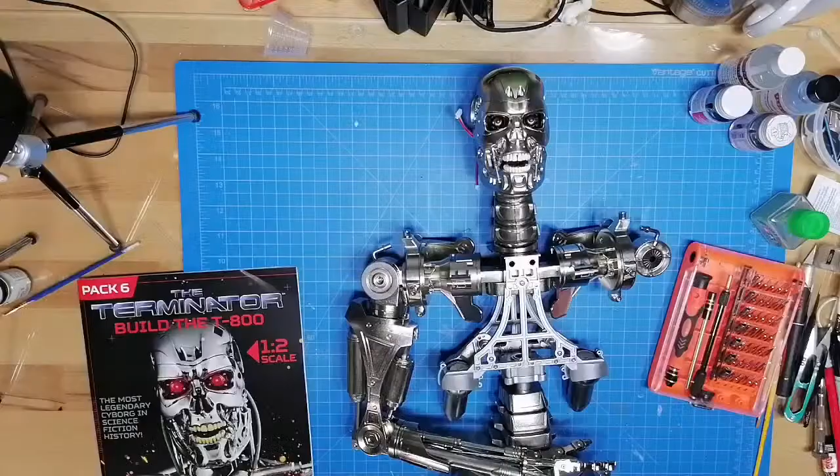Yeah, okay. I just wanted to make sure that it didn't look as bad as it did, because I use a Roku. I use a TV for my monitor where I have OBS going, and it looks terrible, but it doesn't look too bad here on the main channel, or on the main camera.

So at this point, he's up to a pelvis and one arm. Back of his skull is still off. A lot of things going on. I've got up through issue 10. I got issue 10 in this week, but Agora inadvertently left out the magazine, so I couldn't build it if I wanted to. They contacted me, and they said it's on its way. They're still really good customer service, best customer service in the business for these large part works.

So let me get him out of the way, because I'm not even sure if we're going to need him tonight. Actually, my bench is a huge mess right now. I've started shifting things off of the bench, shifting builds out of this room, so that when they're not being worked on, they're not in here. That simply gives me more room to work.

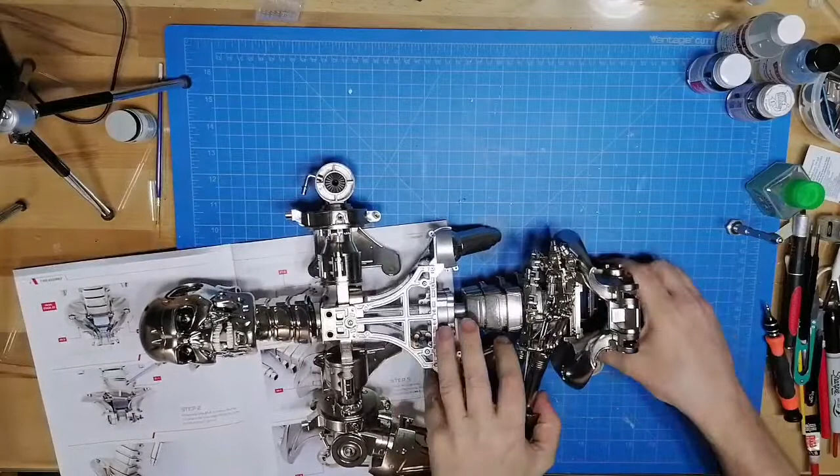Okay, so actually we do need the Terminator. Let me get the screws out of the way. Let me see what I'm going to have to do to get him in here. I'm going to have to move the magazine. Okay, take assembly from stage 50. Identify the two holes in the pelvic shield. This looks like I've got him facing the wrong way. It says to identify these two holes here, and of course it's out of screen. So there's two holes here, and I believe that's what it's talking about.

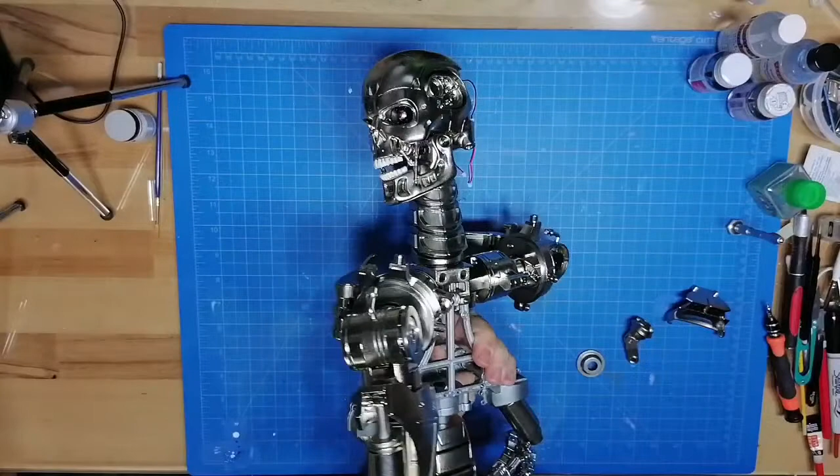So I'm looking at this, and it looks like actually this is the correct way. He should be on his back. He should actually be sitting up on something, against something.

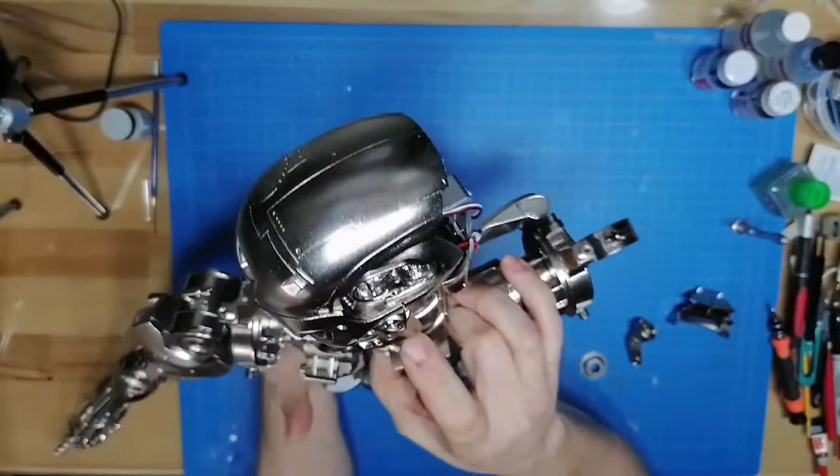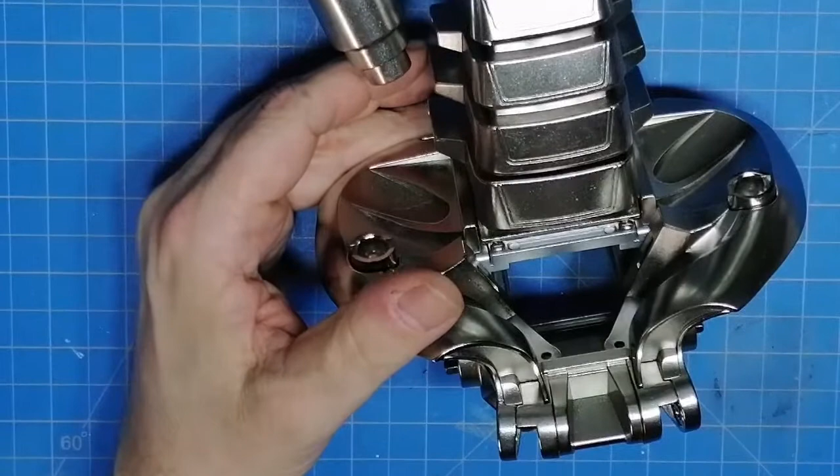So it's talking about these two holes down here. Let me see if I can get it to zoom in. That should be good. So these two holes, here and here, I believe is what it's talking about.

So this goes in here, and I'm doing this where I can't even actually see it, so let me lift him up. And he is supposed to go down. Ah, I see. So what you didn't see, what was stopping it, is right here and here is a slot for these. Oops.

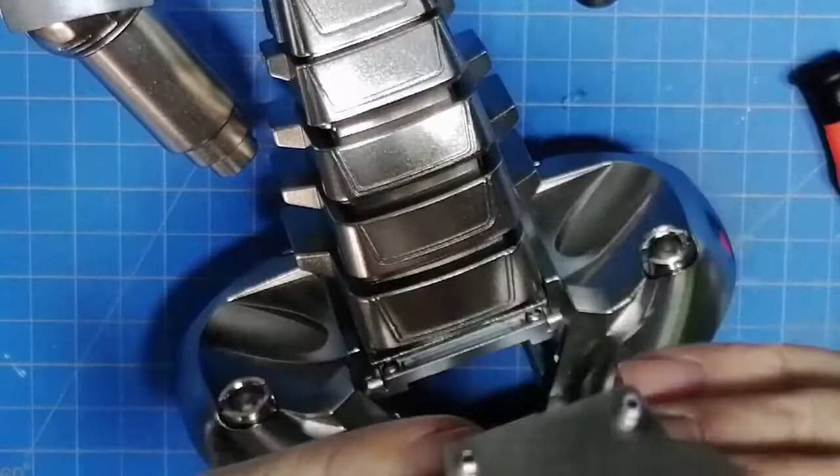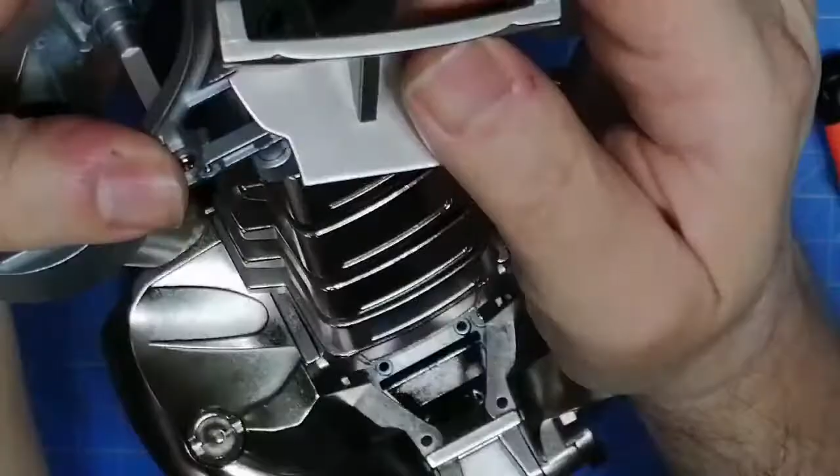You can see right there, there's a couple of, I guess you'd call them tabs, and these pins have to go down. Well, I had the pins in, and I was trying to slide it in, and it wasn't fitting, so what I have to do is do the whole thing at once. When I do that, it pushes down, and it's flush all the way around the way it's supposed to be. Not sure if you can see that.

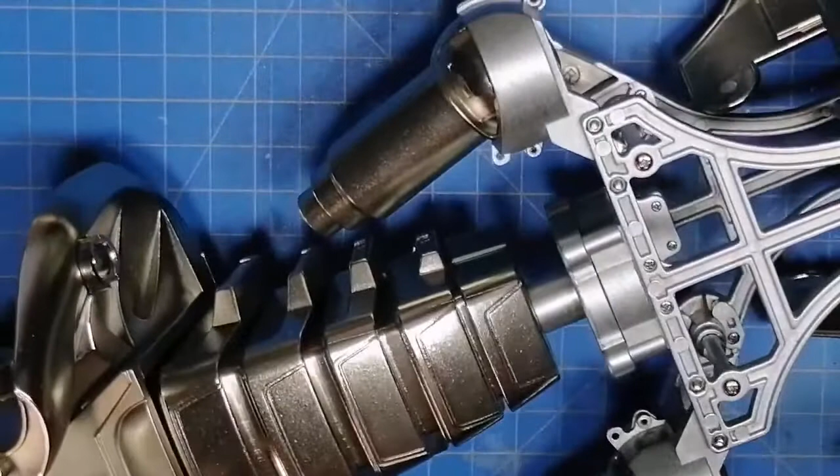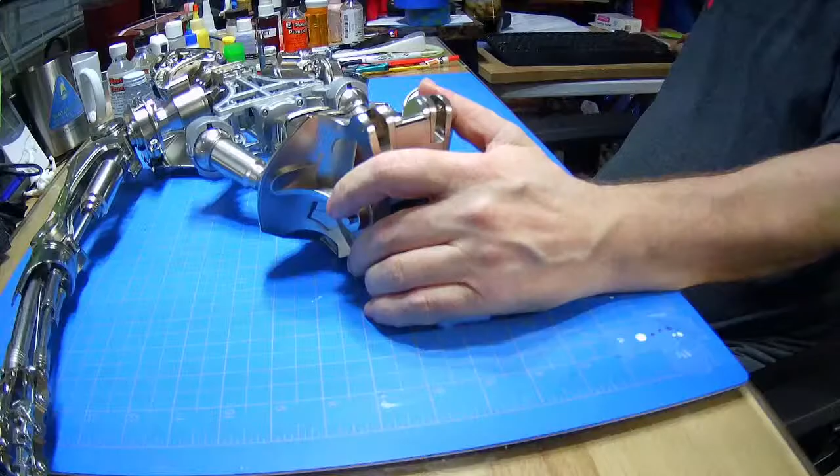Matter of fact, because we're doing it at such an odd angle, let me see. Yeah, this one's better. I can actually bring it over and point it down. And this is the part that I just put in, with the two slots up here and the pins down here. So it's supposed to fit in there. Top edge is flush with the inner edges of pelvic shields, which it is here and here.

Apply a little super glue to the recess of the hip socket. Oh wow, I didn't even catch this. On the hip joint here, it does actually pivot. So let me switch cameras again.

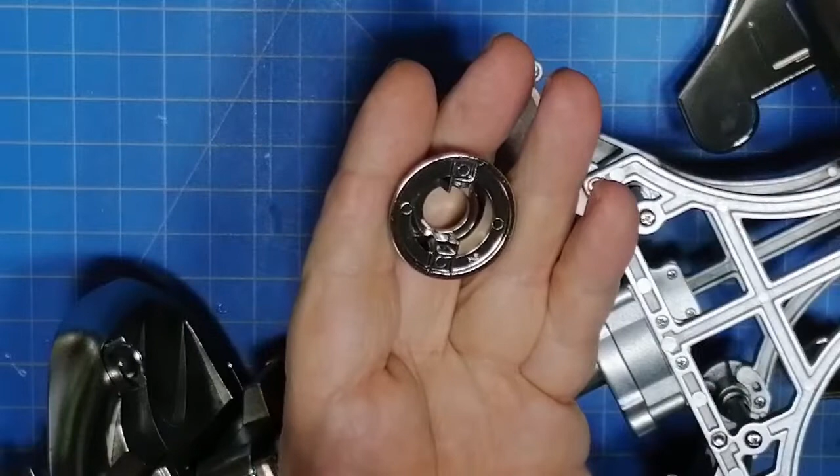Move this one back a little bit. So we've got the joint here for the hip and the hip socket here, and it says to apply a little bit of glue. I'm going to back this back out. It's always easier to hit a larger area. Okay.

And it says to apply some glue here, here, and here, and then make sure that's on the right hand side. This will be glued down on here like that, on these two pins.

So let me move my tape patch, which everybody knows I use the tape patch to put my glue on. I'm going to move it a little bit further, off camera, so that it's not in the way, because this Terminator is getting so big. Come on. I had this glue open today. Again, my cheapo stuff.

So you apply the glue in these spots. I'm going to double check and make sure. In recesses of the hip socket. I'm just making sure, and it looks like this can go either direction. Well, there's no pins or anything. So what I'm going to do is take some glue and apply a liberal amount in here. Do the same thing on the other side. Get a little bit more.

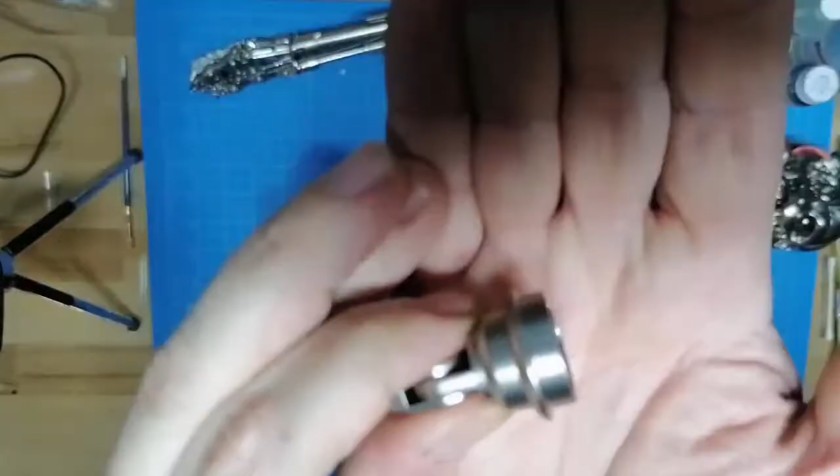And then it says to take this piece from the previous stage, and do the exact same thing, except for right around here. Oops, out of camera. Right around here, if you can see inside this flange here. So let me do the same thing here. Apply a liberal amount. Set that down while I put out more glue. And that's actually the end of that tube. That tube is out. Grab another tube.

So, other things that might be going on around here, just because my wife doesn't have a full-on space yet. She does, but she doesn't. She's got the garage where I was originally, and we're hoping to get her arthritis under control to where she can start doing her stained glass again. And if we can, rather than have her sit out in the garage in the sweltering summer or the icy cold winter, I will probably be giving up some space inside the shop here for her. I'll just take a table out, maybe a second one, and we'll work it from there. Sometimes her projects get pretty big. She needs space to put the project on and a space to use her grinder. So we'll have to see what we can do.

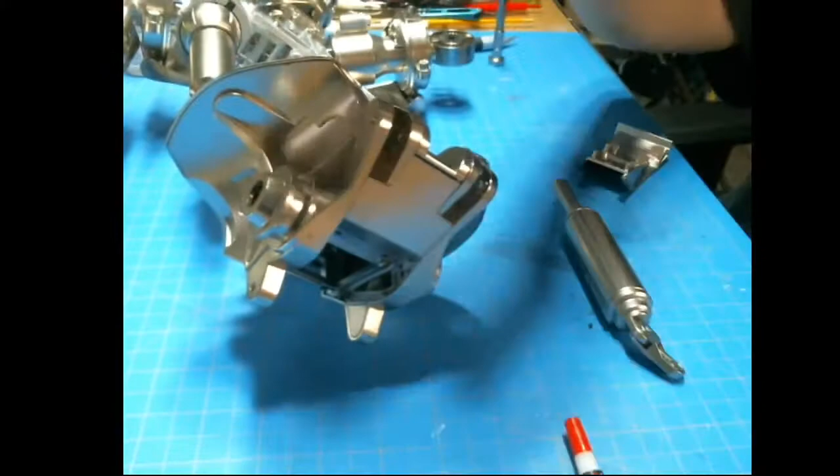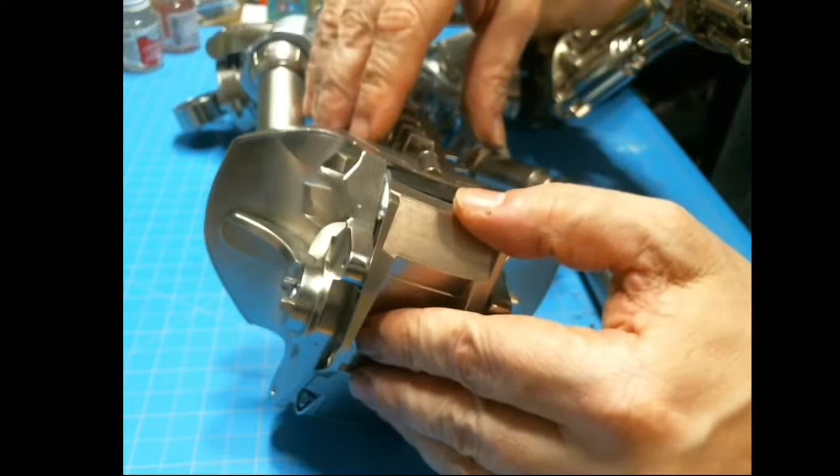So this goes here, and the 4 smaller pins go here in these 4 spots, I think, actually. Let me take a look. Okay, they've got him. Hey, look, found more glue. Okay, so they've got him face down, and this flat spot here just goes in like this. That's not going as far as they're showing it.

Ow! Be careful of sharp spots. That's because I was messing with the pins. Okay, so like I said, these 4 smaller pins will go on here, here, here, and here. Actually, it's going to be these 2, and it is just according to what it says in the instructions. Those are going to be just a push fit, not a glue fit.

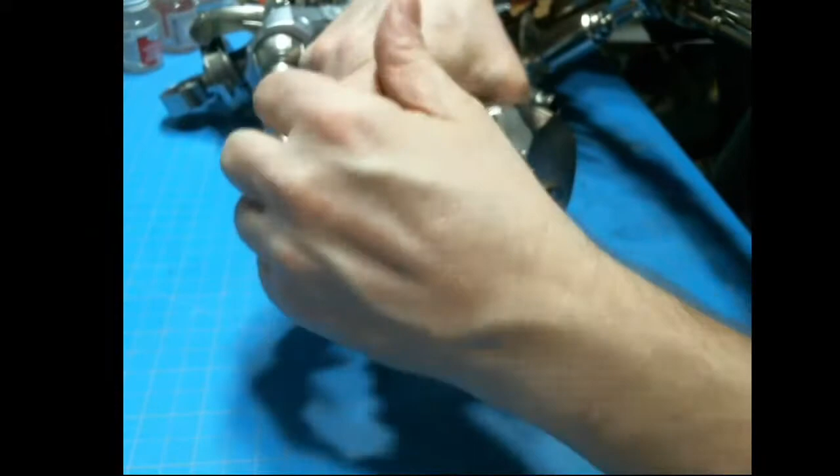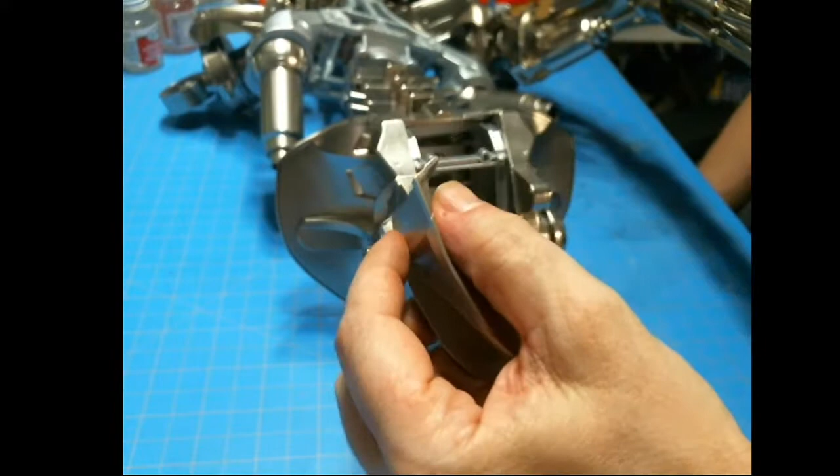Come on. Can't really tell if I'm getting the pins lined up. That looks like it's lined up, but it's just not going in. There we go. That got that, and there went that one. Hopefully you guys should have seen that because it's on camera. This one popped in, this one popped in, and it's firm in place without any glue. So we've got that, and the muscle still.

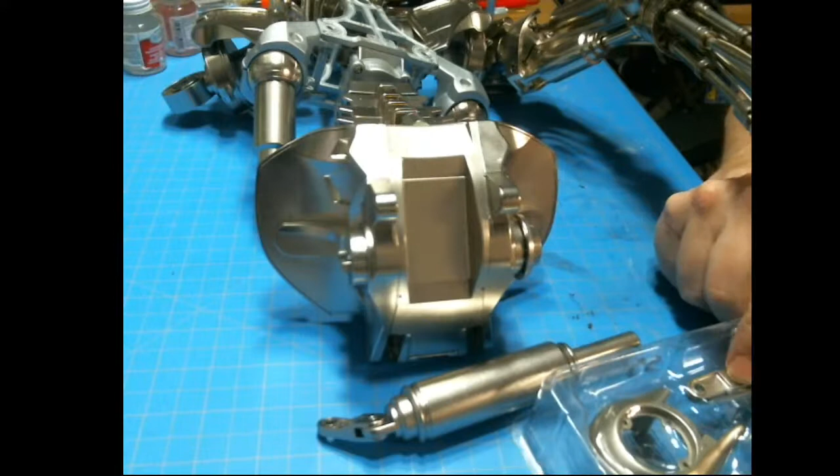So in stage 53, that's 54. Stage 53. Have a leg joint section, hip socket, muscle connect, or hip socket here, inner side muscle, and muscle connection. Okay, so this actually goes down here. It's part of the leg. It might be that by the time I'm done, the bench is not big enough tonight.

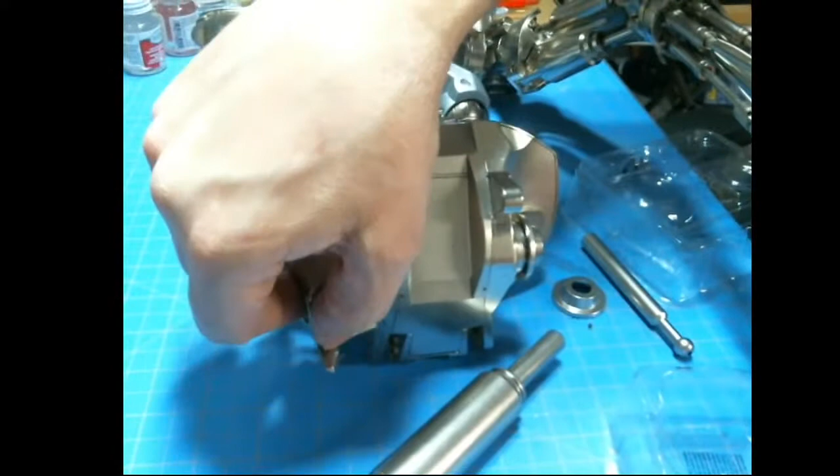Nice. The ball joint on there. So somehow I'm pretty sure this is going to go on here, or on here. Sorry, I'm on the wrong side again. Trapping part of this stuff. And need tweezers, optional, and super glue, and a cocktail stick. So they've still got, okay, they've got him back to face up.

So he's completely face up, which means switch cameras again. Hope you guys don't mind the switching of cameras all the time now, because he's so big he doesn't fit in camera. So fit the inner side muscle. This is the muscle that goes in here. I'm sure it fits down into that socket. It says push it in as far as it'll go. It's not fixed, so handle it with care.

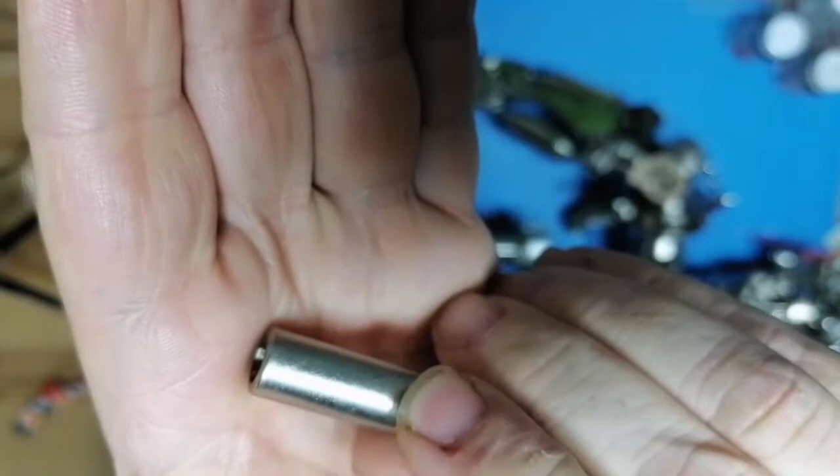So, leg joint section. Remove pieces from previous issues. Let's see, leg joint section, outer muscle, inner muscle, muscle cap, all the same things we've just seen, and the inner side muscle. So the first thing you do, just like the other one that I just saw, must have been the way the light was striking. There is a slight rub mark there. Oh, other way. Yeah, you can't really see it, but to the naked eye, there's a slight rub mark. Not going to matter that much because it's going to be inside of here.

Pop that in there. And again, glue around the top of the muscle cap where these parts that stick out are. I guess you'd call them tensioning points. Sorry, I'm off camera. Putting glue on. And incidentally, haven't said it tonight, so far all the pieces I've been working with tonight are plastic. So that slides down in here, like that. Pushed it down, leaving the inner muscle still in there, but trapping that piece.

And of course, do the same thing to the other end as earlier. Oops, not on the inside. Damn it, I did get glue in there. Get that glue out because I would hate to have something grab that's not supposed to.

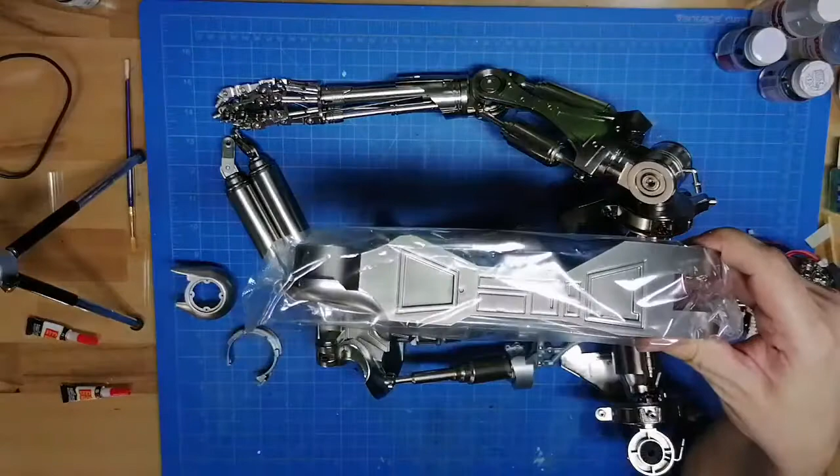And for stage 55, it's fitting the right joint mechanism to the right thigh. This, instead of being in a plastic bag, was in a box. And I can see inside there are some nuts. Okay, so it's got 5 nuts, no screws, surprisingly. I can see why, because they're going to tell me to. It says also needed is the leg joint from stages 53 and 54.

In other words, these, and super glue and a cocktail stick, which tells me these nuts here are just going to be glued somewhere on this leg piece, probably right here. Sorry, I'm off camera again. They'll be glued right here. So first thing it says to take these 2 parts here. So it takes these 2 parts right here. This one's face up, as is this one.

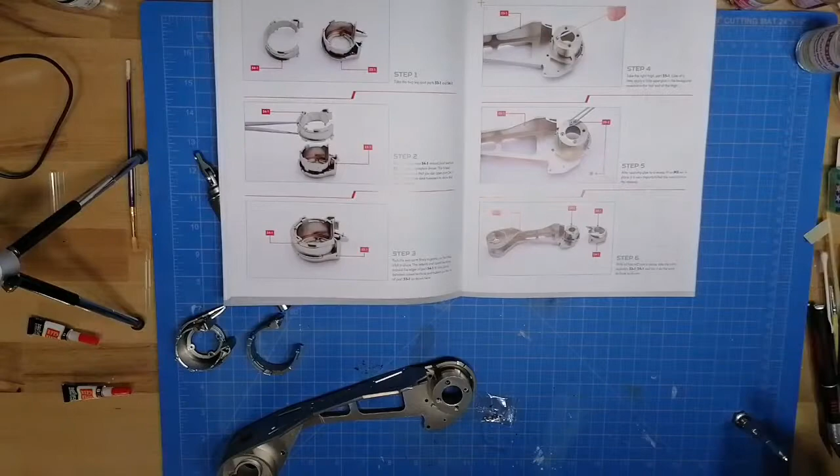Matter of fact, let me make myself a little bit of room to work. Put the book up there. Let's see. So let me get this out of the way. Put these over here. So you can see it here. It's got that part up, that part there. This larger piece is up here on the top, and it slides down in here.

I'm looking, okay, so there's a couple of pins on here. You can barely see it there. There's a matching socket in here and here. So it goes around like this. They show it with tweezers here for clarity, but I had to spread it apart a little bit to fit the pins down in. And these indents fit around the rim, so it is just a pop in place part.

Then you take the right thigh, and like I said, right here they're saying glue these nuts down, it's because you don't have the screws, I'm sure. So we glue the nuts down in place so that they don't get lost.

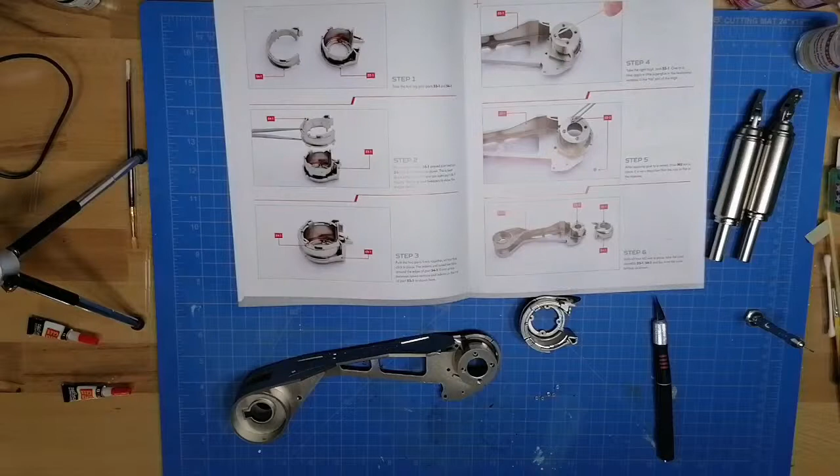Yeah, I agree with you there, Kenny, but it does happen in the summer. Wait, there went my G rating.

Damn it. So I'm going to just put a little bit of glue around the outside, trying not to get it into the hole. And instead of grabbing it with the tweezers, I put the tweezers through it so you can see that it's holding it that way. Come on. I think. Not quite. Come on, get in there. I think I'm gluing myself good. That one just is not cooperating.

Yeah, that one is in there, but it's not in there well. So let me try a different tack. Take that one out. See if I can get that out.

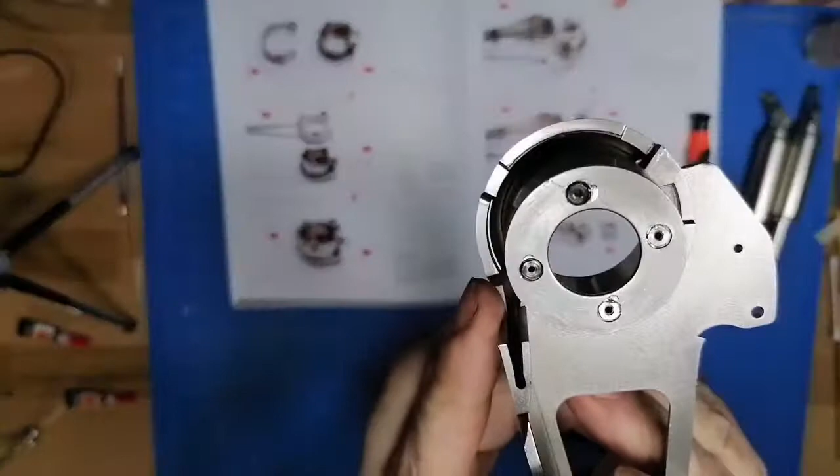So, like I said I was going to do, I just put a drop of glue on this right around each one of the nuts. Interesting. This camera does not like silver.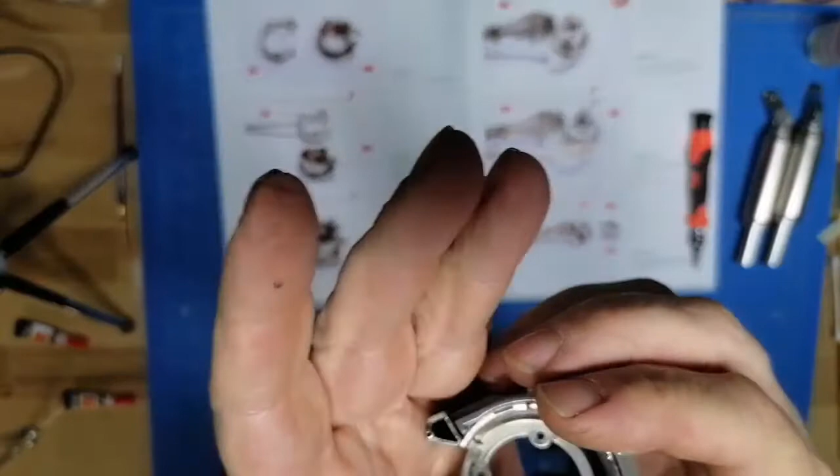So now it says take this part here. Oh, now see this. There's multiple pins here. A pin here, a pin here. Hang on. All right. So there's a pin here. Come on. There's a pin here, there's a pin here, and one down here. And those pins have got to line up with holes in the main piece.

And I just realized, guys, the reason that I keep missing, I'm used to the camera being about 6 inches further this way, but it was casting a shadow, so I had to move it. So this thing just slides down on here like that. Now it shouldn't stick onto the glue, but you can see how it should have held those nuts captive.

Where did I put the screw box? I know the screw box is here. Hate it when I do that. Oh, I hid it in plain sight. It was right underneath the orange screwdriver box. Nice.

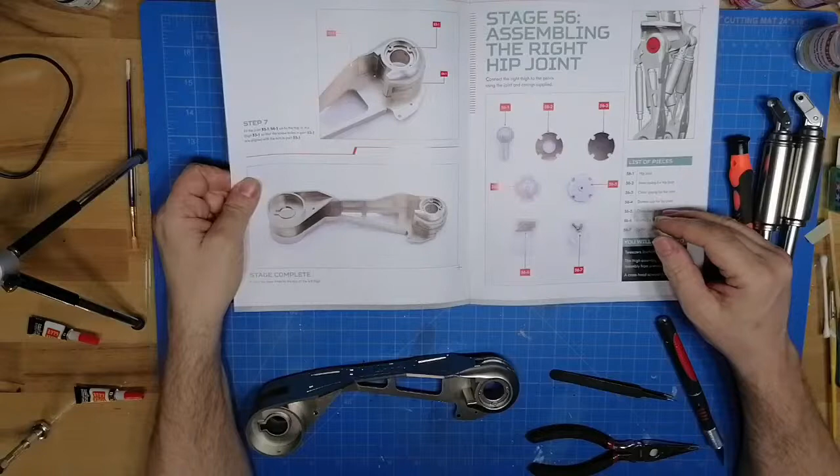So let me throw this spare nut in here. So once that's on there, yeah, so it says lay it on the tabletop so everything's lined up. And that's where I was originally going to stop, but we've been going for 55 minutes, so I'm going to go ahead and press on with stage 56 through 60.

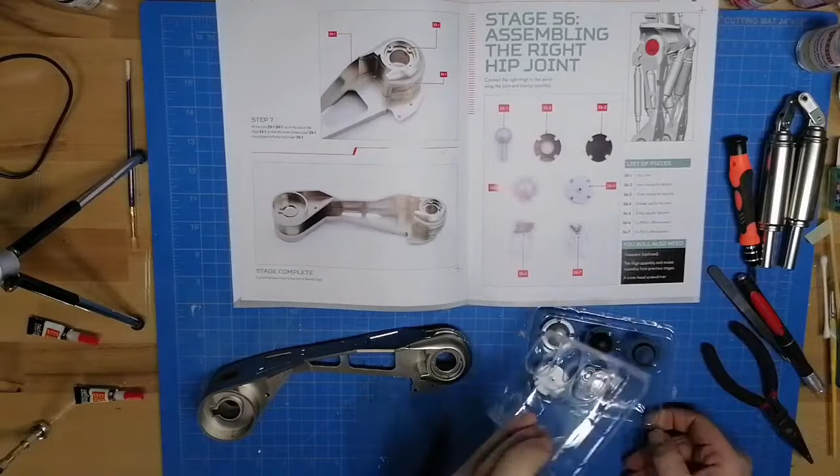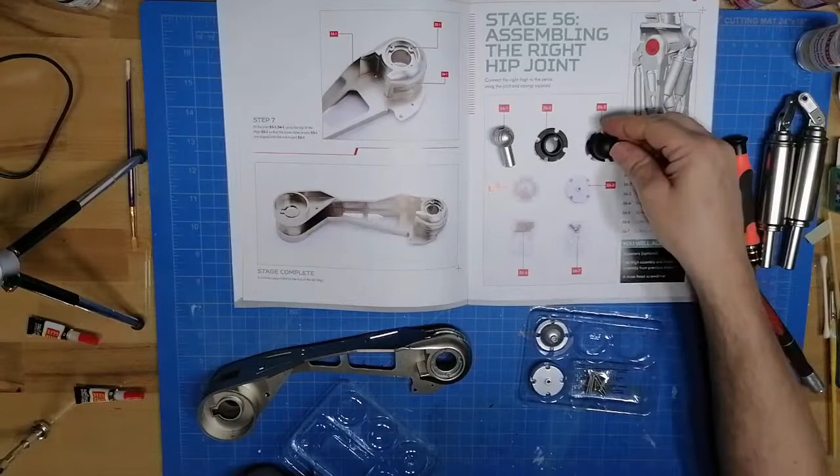Stage 56, and there is a lot going on in this stage. We've got the hip joint, and you can actually see them. I'll set them on top of the graphic for them. We've got the hip joint here. We've got the inner casing, the outer casing for the hip joint, domed cap. Let me see. Feels like, yeah, hip joint and the domed cap are metal, as is the outer domed cap here.

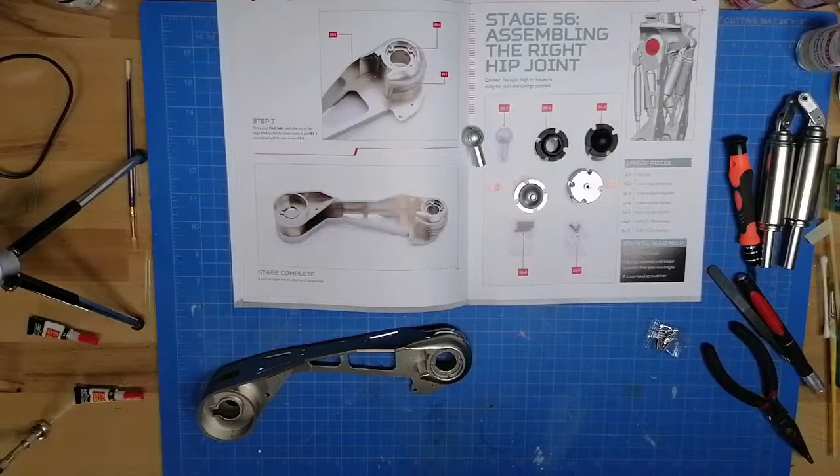And then we have 5 18mm screws and 2 8mm screws, 1 spare of each, as always. This might have been worth waiting for.

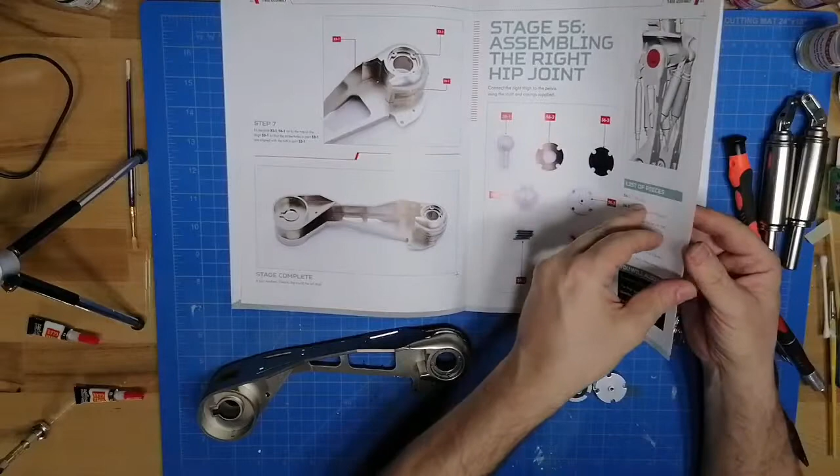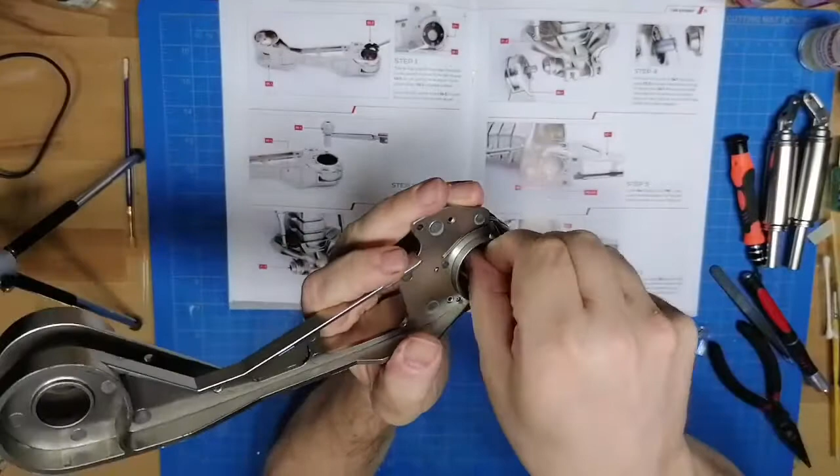So this gets flipped over. You set the inner hip casing in here, and there are some lugs in here for screws. You can see the 4 of them right there. This has to slip down over them. Let's see if I can do it while it's up there. Maybe. So that slips down over them like that.

Wow. You should be really good at cars then. I don't think I'm horrible at them, but I need some work.

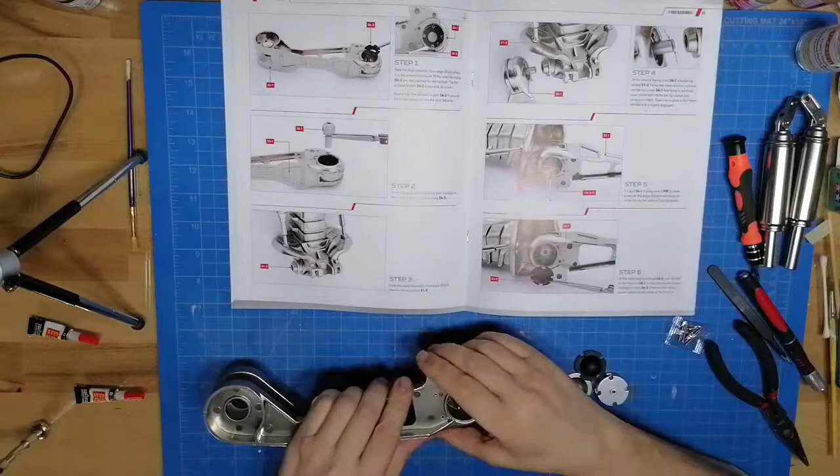And so the hip joint now goes through here. They show the striations on the hip joint. Oops. They have them parallel to the length of the hip joint. Take the model assembly. Let me move these out of the way. Terminator's got to come back over. Move this leg over here. Oh, good Lord, this thing is heavy.

They got them face up. And we are putting it on the right hand side of the Terminator. And there are a couple of cutouts in here, and those have got to hit. Looks like they go in here. Is it vertically or horizontally?

Okay, they will go vertically. I don't think I could get this on camera, but inside there's a couple of tabs that this has to fit onto. So this will go down in here like this, and I felt it drop down on there. Stay. So this is the first screw of the night.

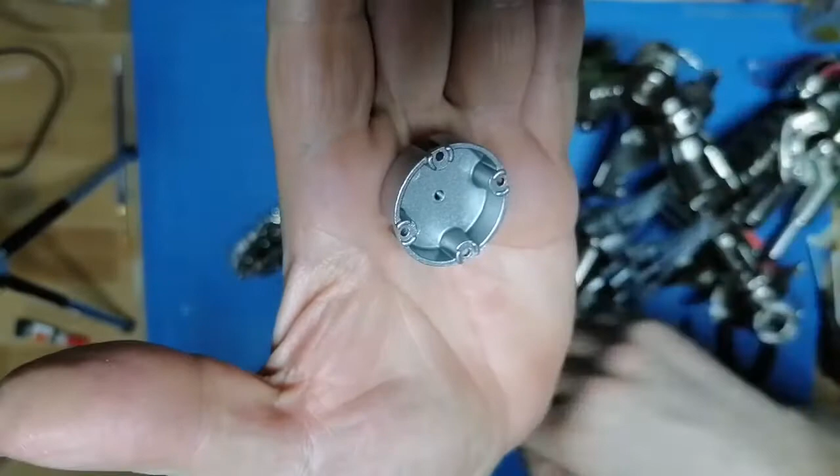And then this piece is going to do the same thing. This is where everything is going to get tightened up. So that fits down over there. Using this cap, which again has to fit over top of those. And there's a little curved spot that the top of the screw lugs is going to fit into. If I can get this on there right. Maybe. That's on there.

So let me try getting a screw down in there. That one's not going to work. That screwdriver should. That doesn't feel right. Okay, it is going into the hole. For this one, I have to stand up, which I normally don't have to. But let me make sure, see if these are all going to drop into the holes like they're supposed to. These should be dropping all the way down to the nuts that I glued in a little while ago. Okay.

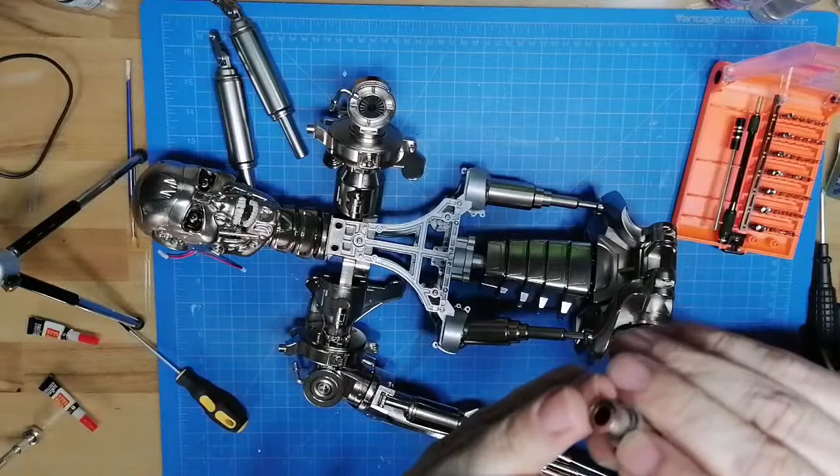That takes care of that. It says to take the leg part and insert the insert, and there are some tensioning marks on here, some raised places. Push this in. Does not need super glue, I don't think. Yeah, it says there is no glue needed because it is a tight fit, which is correct. And it has a slight gap left when you're done. So it says we're done at this point.

So let me get out 58, which looks like it's called the right leg plate. It looks like it's an outer part of the leg, or it could be just a support piece. And it's plastic, so it's not support, it's just going to be cosmetic. So there's that, and 6 screws, two 16mm, four 4mm. So this is going to fit on here like that, I think. Yeah, just in there like that.

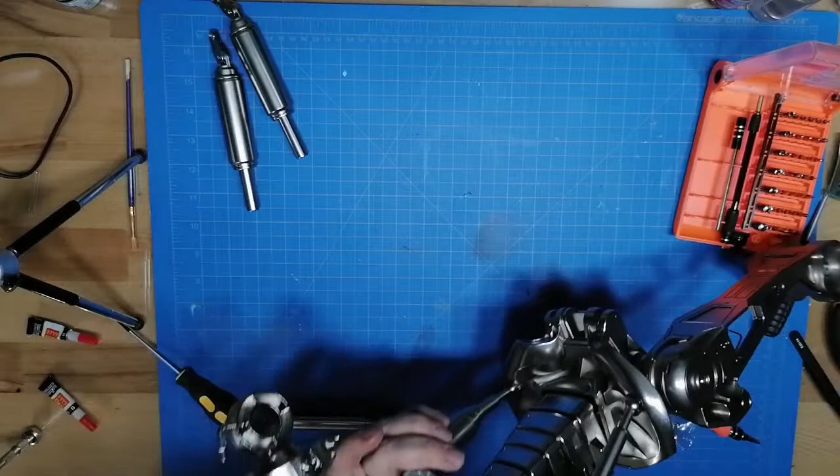Let me see if I can get his shoulder rotated around. Someday I'm going to stop having to rotate this shoulder. That helps if I just move the shoulder out. And it still rotates really well one direction, but not so well the other. See if I can get him to hold himself up a little bit, which is not working. Maybe there, that tape. Grab this, move him up a little bit.

And I apologize for the choppiness, guys. I do not know why my cameras are being delayed.

Okay. So now that that's on there like that, you can see him. Indicates how it fits in this side, fits the leg. There are 3 steps talking about this leg piece. I see. From the inside of the thigh, 3 small screw holes in the part. Okay, I did all that to get this to where you could see it. And instead, you need the inner side of the leg. Wow.

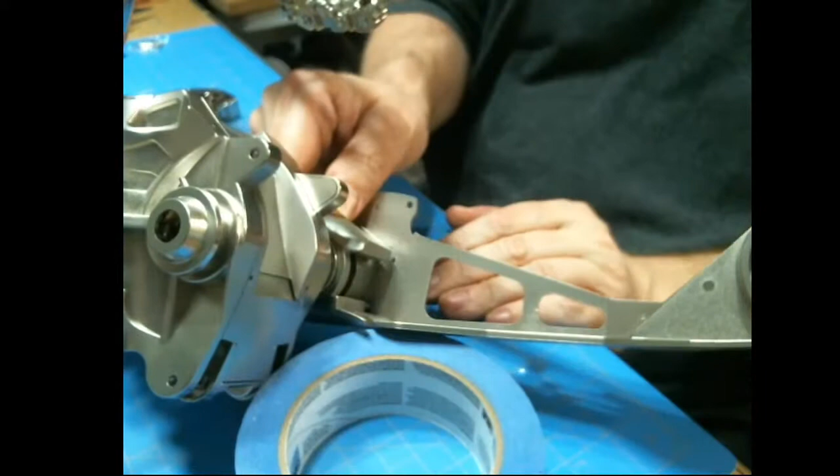Interesting thing I just saw. Let me switch cameras to one that's a little bit easier to move, and this is loose. The thigh is all intact, but that is loose. Now, I don't think I missed a spot where it said to glue that. So we'll see what happens. We put this back in place.

Nice rub mark there. And so it says there are 3 screw holes. One here, one here, one here. I think it's those 3. Let me see. Actually, it's this one and this one that we're putting screws into. And we use 3 out of the 4mm screws on there.

So let me put the apex back, the hex head, get the screw, the cross point on here. Whoops, missed completely. I'm hitting the screw hole, but I'm missing the piece on the other side where the screw is supposed to go into. There, that's better.

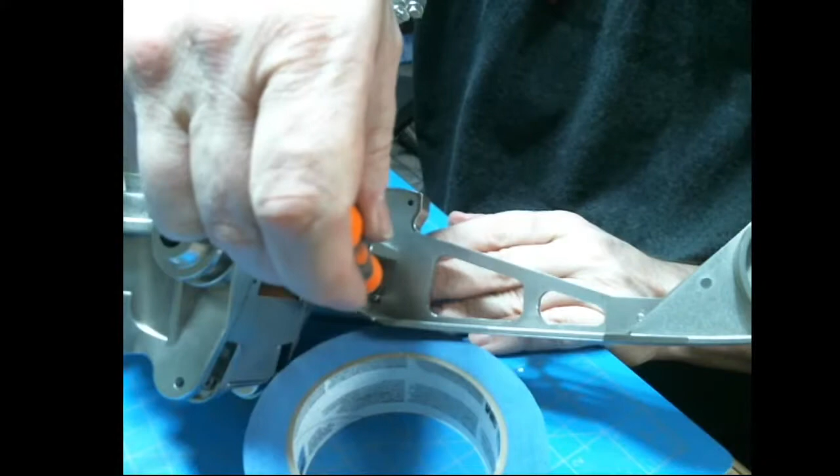So let me get this one. Did the same thing, pushed it out. This is pulling it back up. And then the last one. That is tying that piece, the outer leg piece, in place.

This one is a spare screw just like normal. Got a spare of the larger one, and it says to take this piece, the leg piece with the cap. This screw is going to go through here and into the hole right here, except I'm holding it up the wrong way. So it'll drop down in there like that.

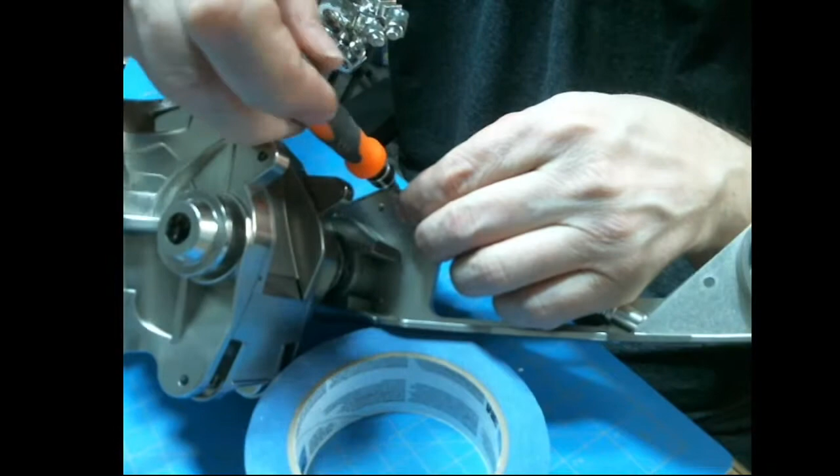Tighten it down. It should be able to move, I'm thinking. It may get actually attached. No, there's going to be something that attaches back down here. Just tighten it down, leaving it able to move a little bit. And it says take note not to over tighten it. Replace with those 3 screws. Basically, this is how it looks when this stage is done.

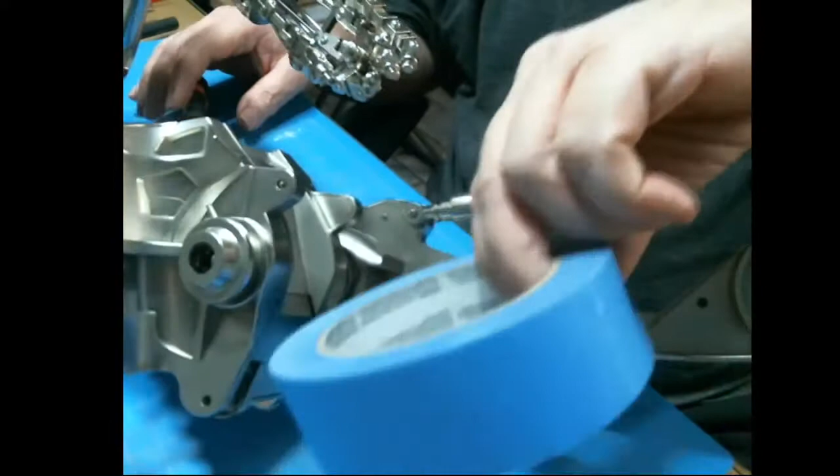59. That's interesting. This does not look... I see. 59 and 60 were so close that I mislabeled them. The one I just had was 60. This one is 59. The only difference between the two packs is that piece there that sticks out from the circle.

That would be the, it just says right leg joint. Then this is the tendon. Center for joint. Looking what they call this, 59. Ring for tendon. Just some small parts and more screws.

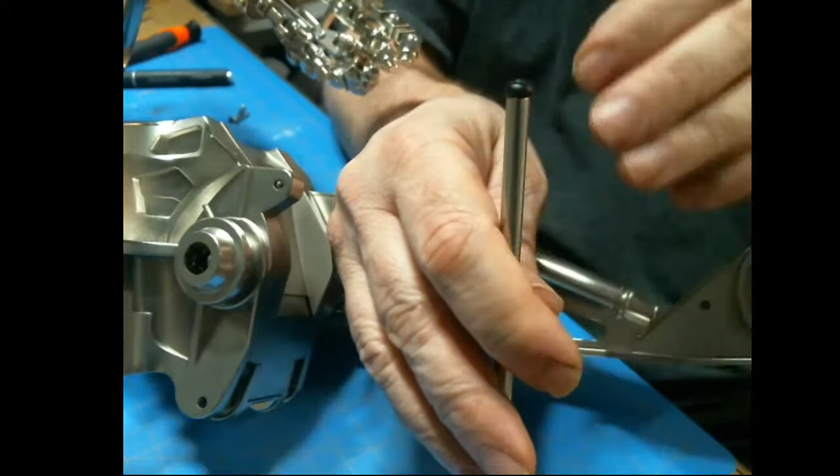Take the thigh muscle. And this one is marked with a 1. I don't know if I can get it to where you can see it. You can barely see it right here. One's marked with a 1. I'm not using this part here. It's marked with a 1, and the curved piece here goes out.

I need to turn the Terminator over on his back, which means I need to move these screws. Again with this arm. There, that's better.

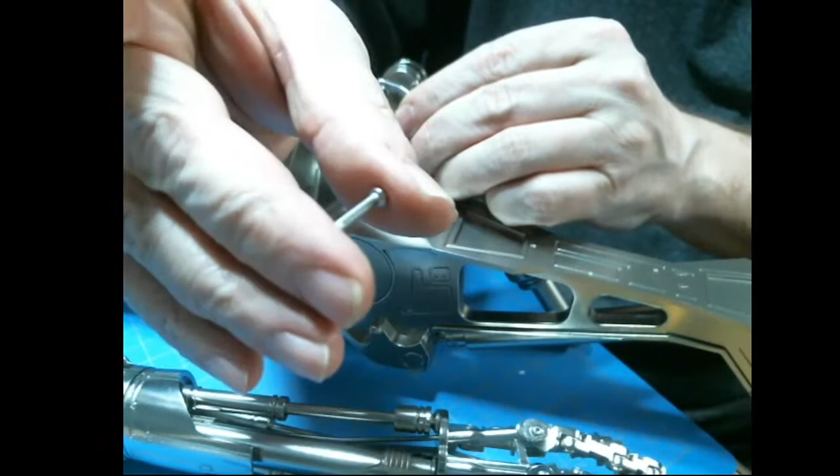So the curved part of this goes in here. The other one will go in here. But the curved part, or slanted part here, goes to the outside. So take one of these 2 long screws here, like this. Put it through here. And it's only got threading on the very end, which means it's going to allow this thing to move pretty freely.

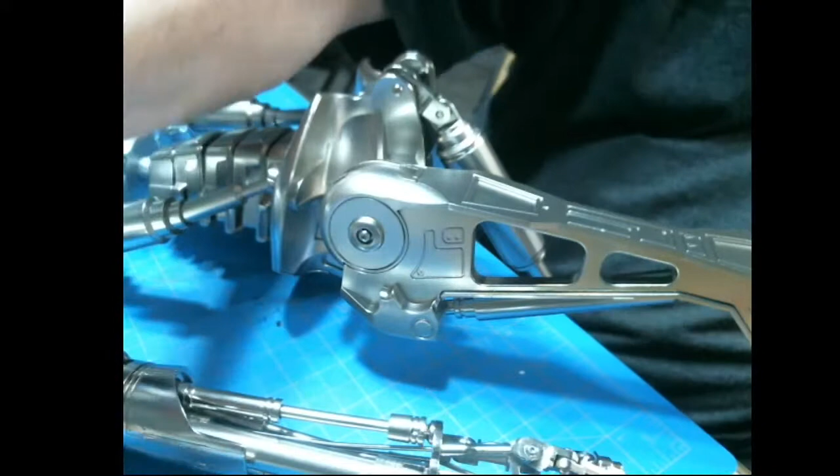Grab the other screwdriver to make sure it's tight. Leave the hex key behind. So that's going to hang there for right now. And we have this assembly and this assembly left over. I'm pretty sure at some point this goes in here.

So pulling back 59 or 60, which I thought was 59. Got another cap like this. Got another muscle. Another one of these ratcheting pieces. The same little rubber cap. And a few screws.

When I finish with this one, the Terminator will officially be 1/2 done. Or the whole build, because I'm guessing that the base, I haven't seen anything of the base yet, but I think the base is actually, you build it yourself. Let me move these extra screws over here with these.

And again, do the same thing here. We're going to glue this piece, this black piece, into this silver piece. Let me get out a little bit of glue. There it is. And like I did before, just run the glue around the inside there.

Key thing being that it doesn't matter how much I use in here, it's not going to ever leak out to anything. And once this piece is in place and it's actually torqued down where it's going to be, there's no way it could come out anyway. So there's that. I set it over here with the other one. Same thing as I just did. Let me get a screw ready.

So same thing, got the same raised part, recessed part in here, put this on here, put the screw with the flange through, tighten it down. And that's that one done. Except for this one.

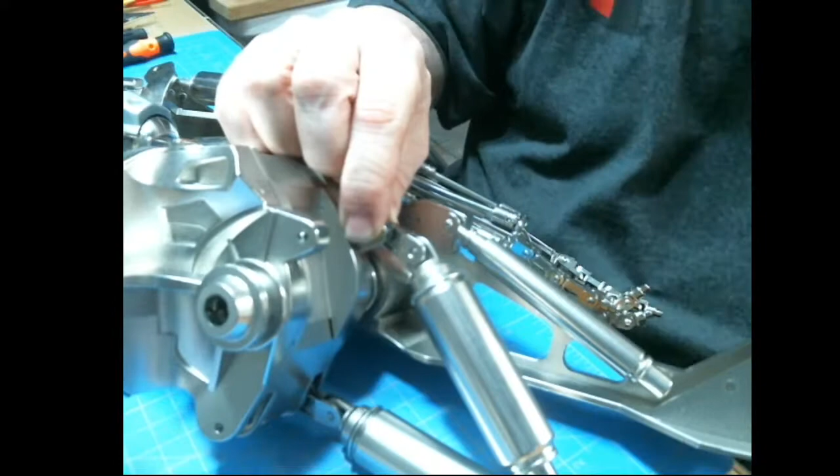Again, it's with one of these screws where just the end is threaded. So that'll go through there like that. That seems like a really long screw for that. I don't know.

Let me double check which screw it is. 12 millimeter, and I think that's an 18 millimeter. Yeah, the 12 millimeters. Sorry about that, guys. It is not the same screw as before. It is a shorter one, and the threads run all the way up. So let me slide this in here.

See if I can get it. It's a little bit difficult with the leg there. Let me see if I can get the leg to drop forward. That's better. Now I can actually get to the screw hole. And I'm even still in camera.

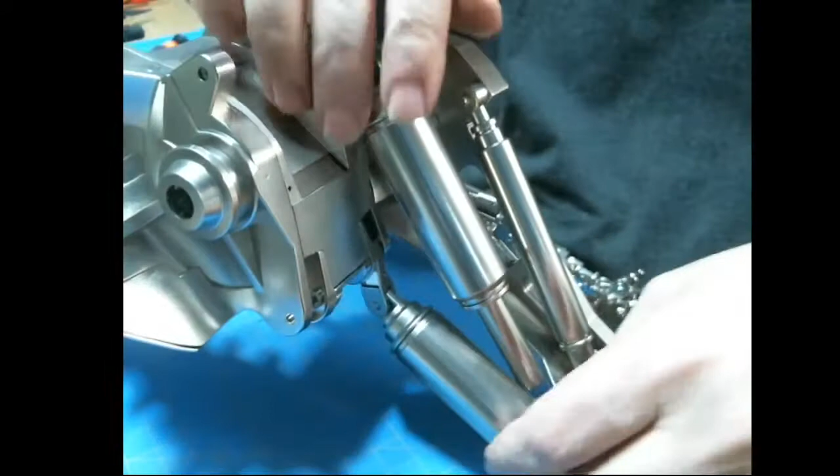So now let me put him back up here because we're doing something with these other muscles. Take the tendon. So take this tendon. And it goes in the front. And I got 3 pieces hanging here. Which one is this?

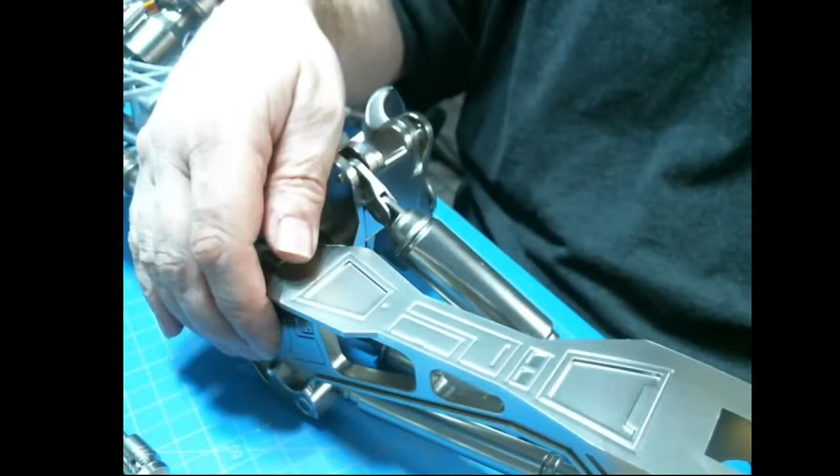Okay. And I've got him back over again. Sorry, I keep rolling him back and forth, guys, but it's easier for me to be looking at the pictures the same way they're in the magazine. That did not sound good. It sounded like a screw's loose somewhere.

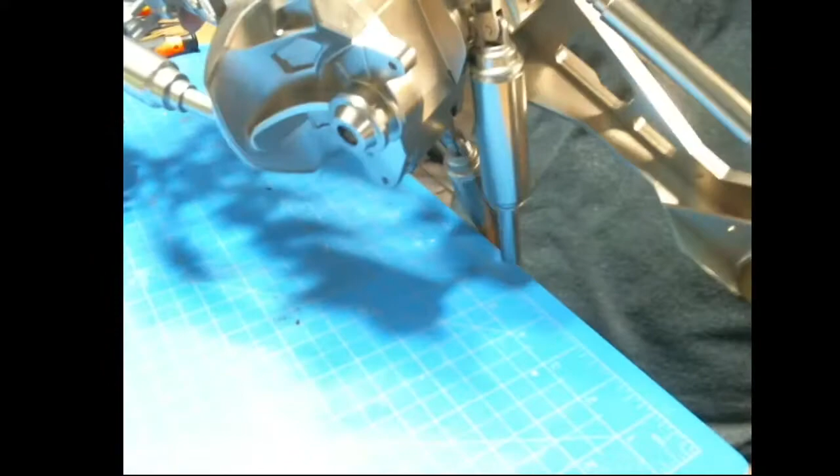Alright, so this tendon, front right thigh muscle, so here. Like that. Take this one, and it says to turn them back over. I wish they'd make up their mind. So this one goes on here, on the back thigh muscle. So the front thigh muscle has a screw on, okay, the screw is on the outer side.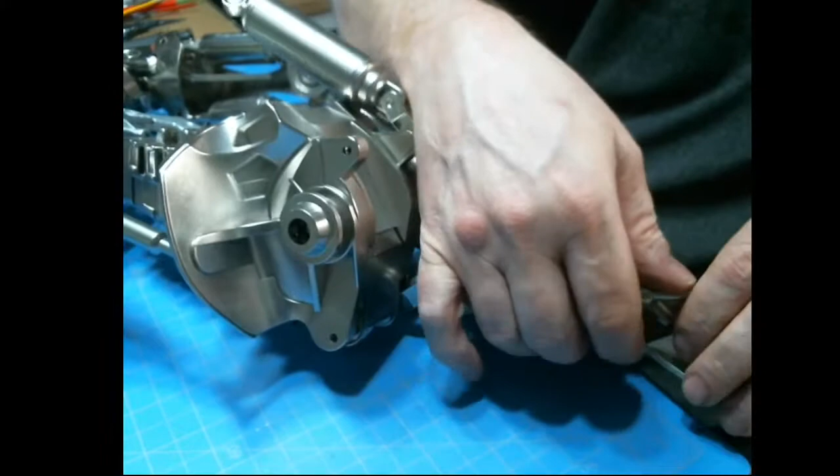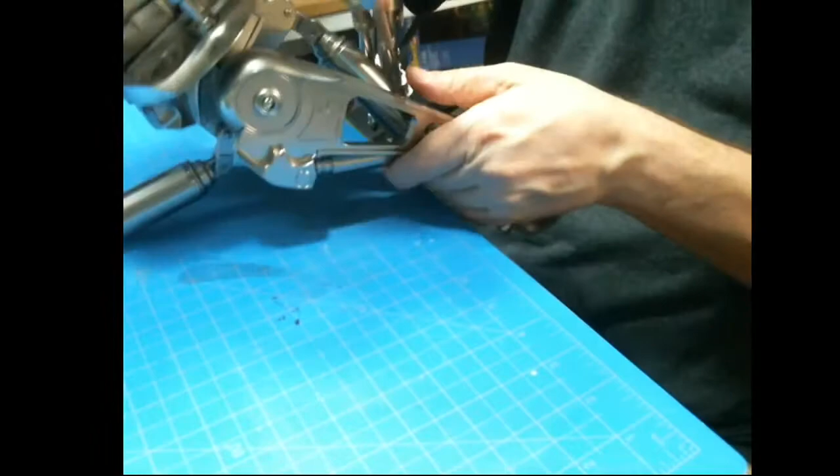Face outward. Okay, so this part should face outward. I'm looking at this, guys, and it's not quite making all that much sense to me. I wonder if I can sit him up, and that'll make better sense. Somehow, these have got to line up.

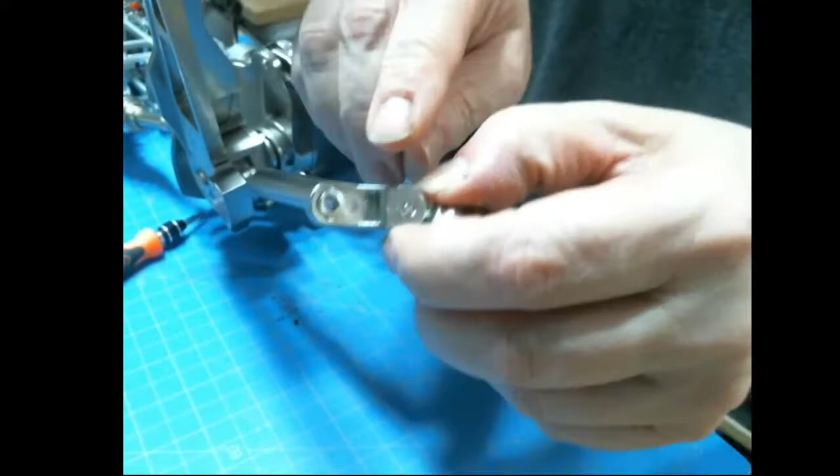So this piece with the nut, which, let me double check something. That would make a huge difference. I see what I did wrong. I put the flange towards the inside here. On this one, the flange, alright, sorry about that, guys. So on this one, this flange, that piece right there, where it's a little bit angled, is on the outside instead of the inside. I had it on the inside. Hopefully this will change everything, because it just didn't look like it was going to line up at all.

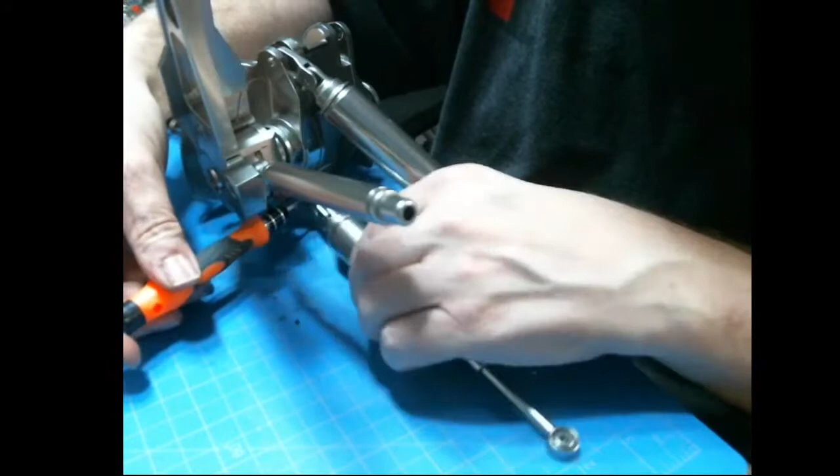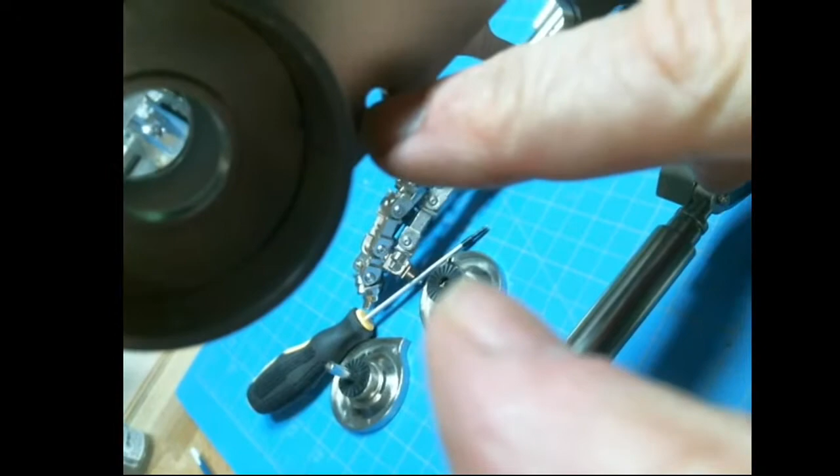I'm going to leave that a little bit looser than it was. So now this is supposed to end up on this side. Yep, actually that now fits. Let me take the longer screw here, and it has the flat to the outside. Flat to the outside there. Take the screw, and it's easier this way. This hole here is where that screw is going through. So it'll go through on this side.

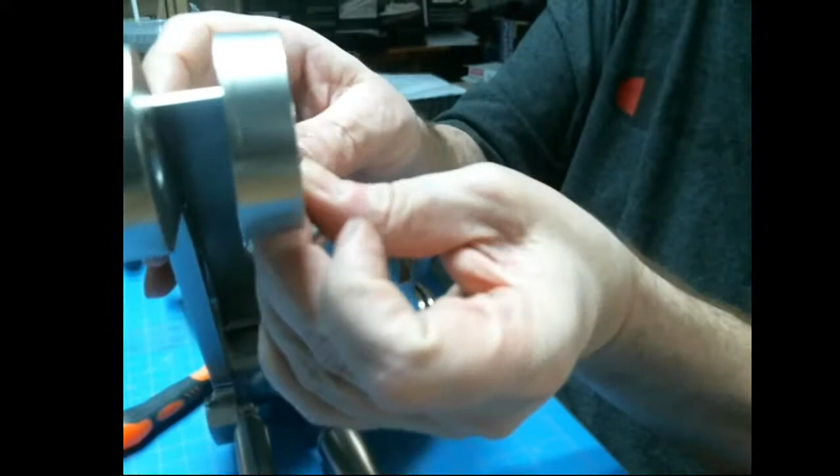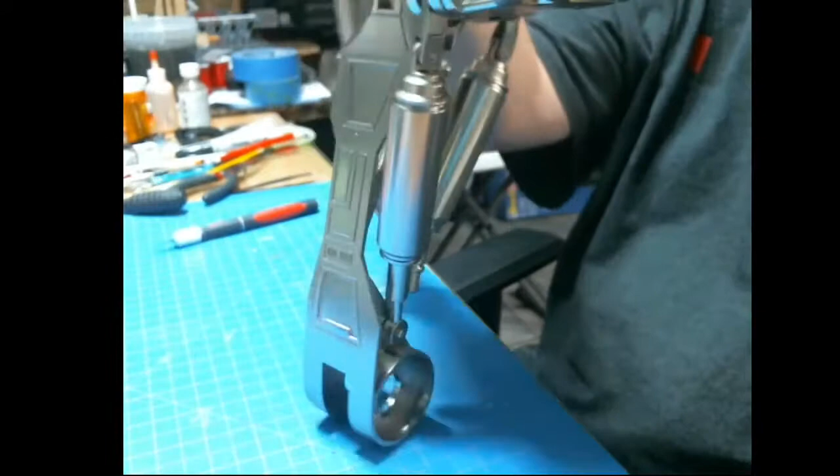Of course, the nut has to be towards the inside of the thigh, or it's still towards the outside of the leg, but the inside of the thigh itself, inside of where the joint is. Tighten this down. I'm actually contorting myself into a weird position just so I can see it. And now that leg actually kind of works. He now has the front thigh muscle tying down here at the knee.

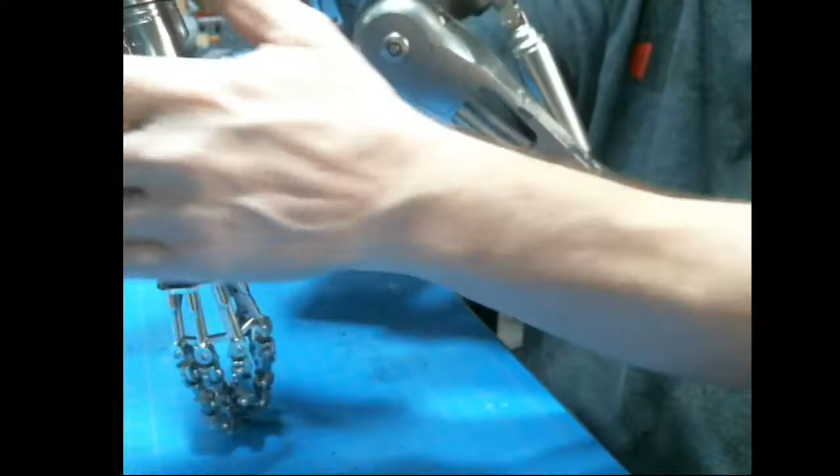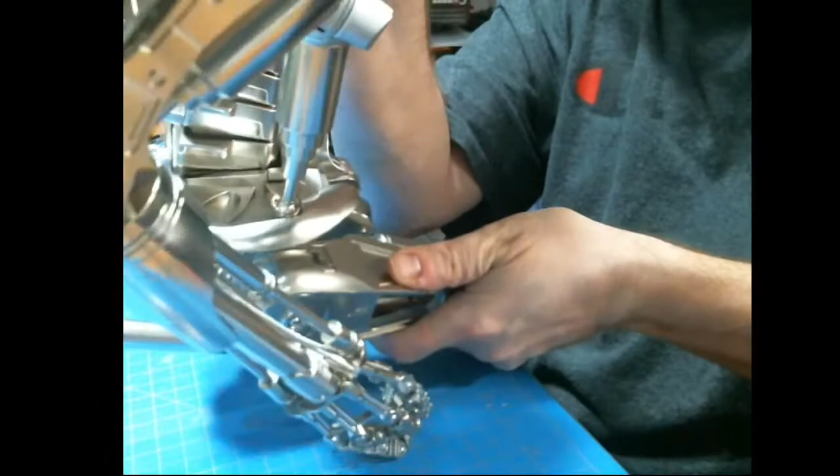Okay, so that's what he looks like at the end of this issue. Let's see if I can get him. He's not going to balance really well because he's missing a bunch. Wow. Well, he doesn't fully sit, but he comes close. Let me see if that other camera is. Okay. So this is, man. There is a screw loose somewhere inside there. But if it doesn't affect him, I am not going to mess with it. Sounds like it's up under here.

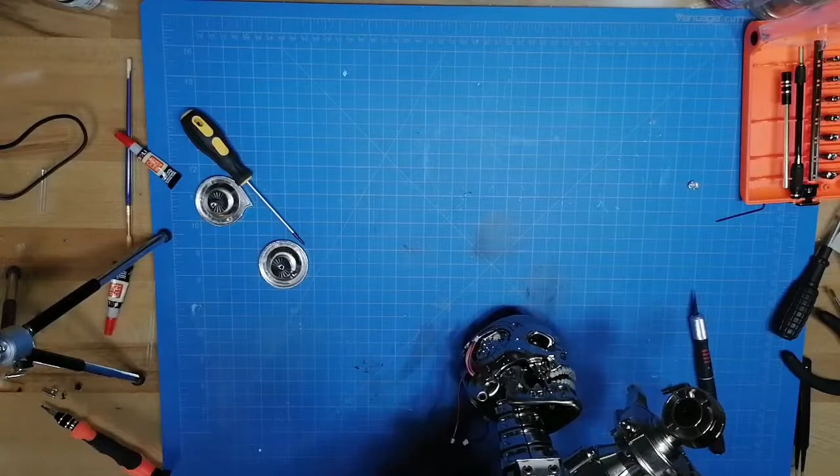So, there he is in all his glory. He now has part of a leg. These are knee joint pieces. They're going to go into the knee joint sometime in the future, and I'm off camera. They're going to fit together like this. There's going to be a screw that goes in there, but that's for another day.

So let me flip over. I still have a camera pointed at me. Yay. Okay, so a lot of work tonight. Did a full magazine instead of just half. With that being stage 60, he is now halfway complete. Pretty impressed with him. He's getting larger. Still got the left arm, left leg. Still got a lot to go, but he's getting there. It's an enjoyable build. I shouldn't have left it alone for 6 weeks. If I hadn't, I would have a better idea of what screw is in there that's loose.